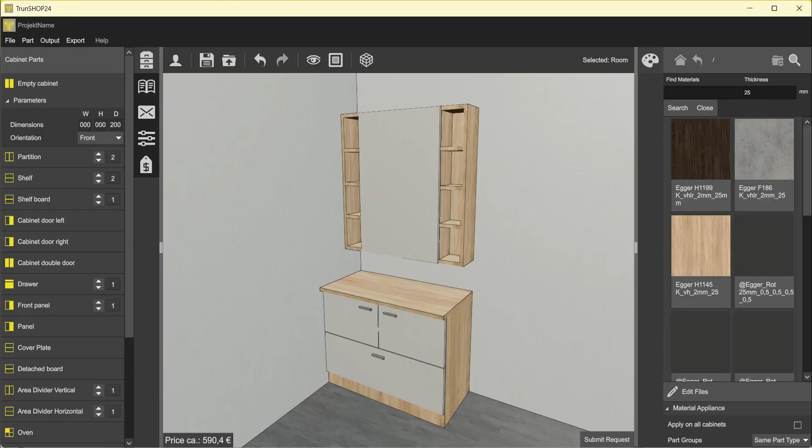In this video, I'm going to be showing you how to create a bathroom vanity with wall units like this one.

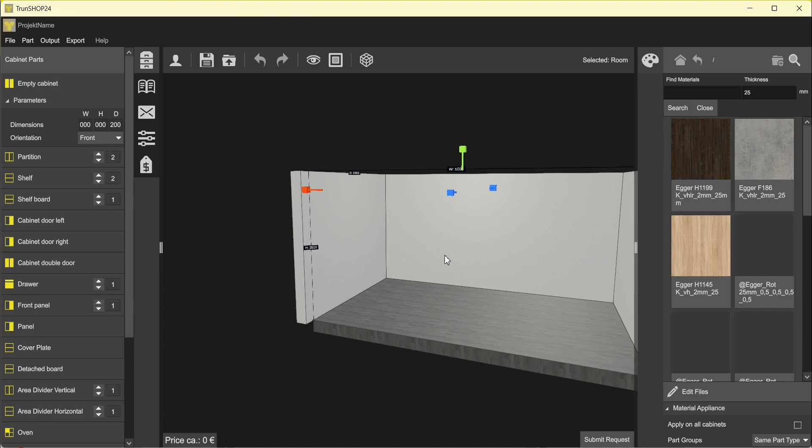Okay, so as always, the first thing that we're going to do is go here on File and start a new project. And then we have our empty room. I'm not going to change the dimensions of the room because I'm just going to place our design in the corner, that's it. But if you want to change the size, it's up to you. Remember, changing the size is always here. But for this project I don't need it.

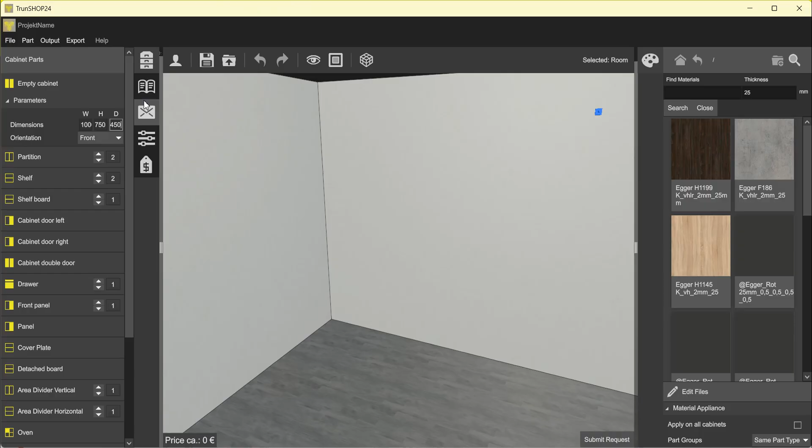So let's start with the vanity. We have the dimension of 1000 of width, the height of 750, and the depth of 450. Then we drag and drop. It's there. I'm just going to place it on this corner.

I'm going to change the material already to match this one. That's the default one. So you're going to come here on the magnifying glass. I'm going to type 25 millimeters and search. It's this one. I'm just going to drag and drop it there. So everything is the same material.

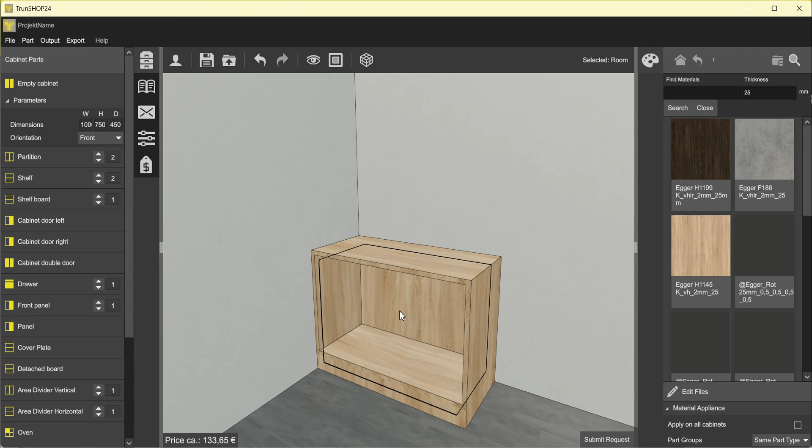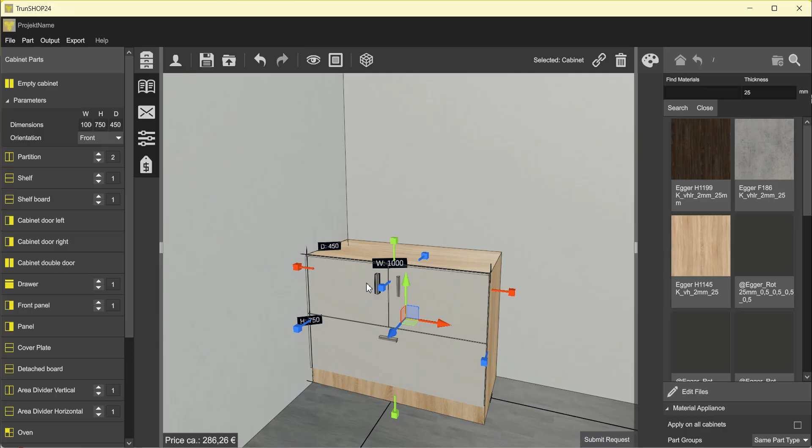Nice. I'm going to apply one shelf in the middle because in this part I want a drawer, and the top part will have two doors. So one drawer here like this, and for this part the double door, so cabinet double door like this. I'm going to change the handles because I want them to be all horizontal. So grid settings here—oh no, sorry, horizontal—and yeah, it's changed just like this.

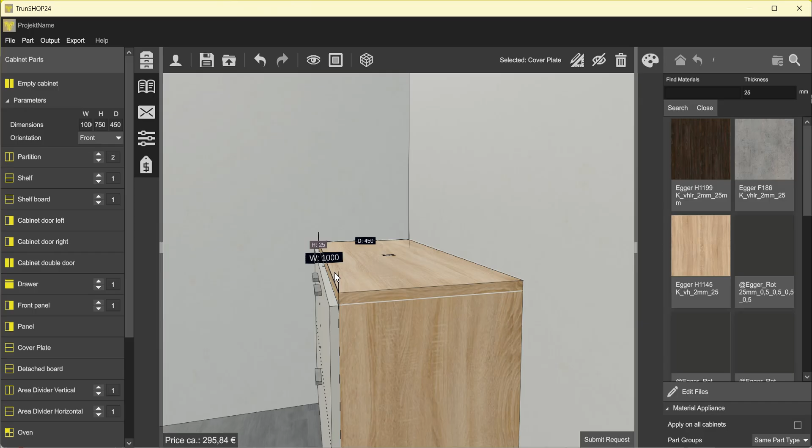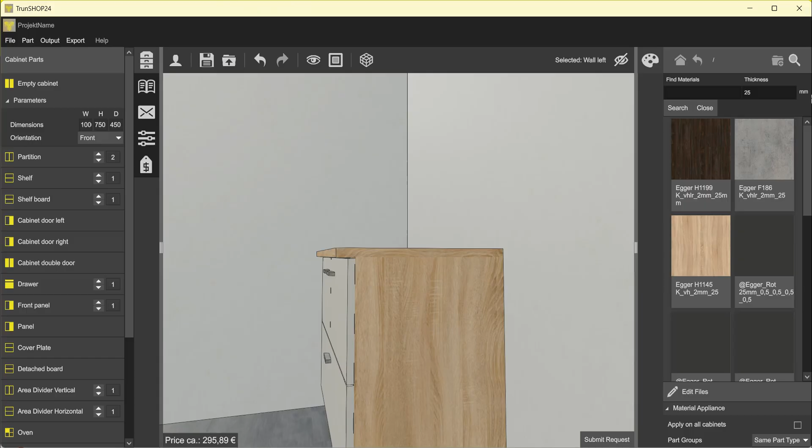Now I need a cover plate. So I'm going to come here, cover plate. I'm going to drag and drop, but as it's a wet area, I want the cover plate to go all the way here, so I'm going to add 50 millimeters on the depth. I'm going to come here and put an overhang front of 50, 50, and then it's like this. You can see that it's going all the way to the front.

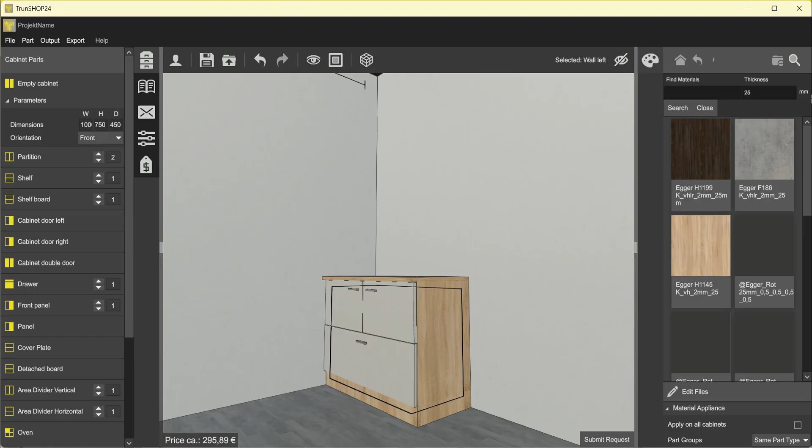Okay, I'm going to put just 750 of height because this would be for those sinks that are put above, not inside. But the dimensions are up to you.

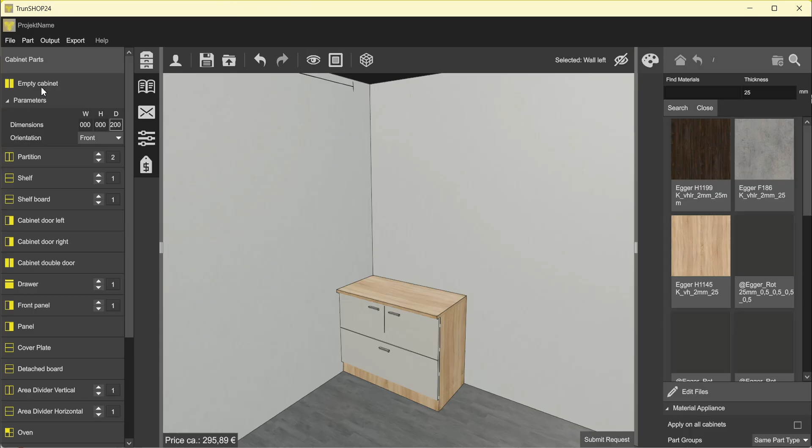So let's put the wall unit that you could install a mirror. So 1000 here, it's the same. The height will also be 1000 and the depth will be only 200. Then you drag and drop. We're going to remove the baseboard because we don't need it, and then like that, and the height of 1000 like this.

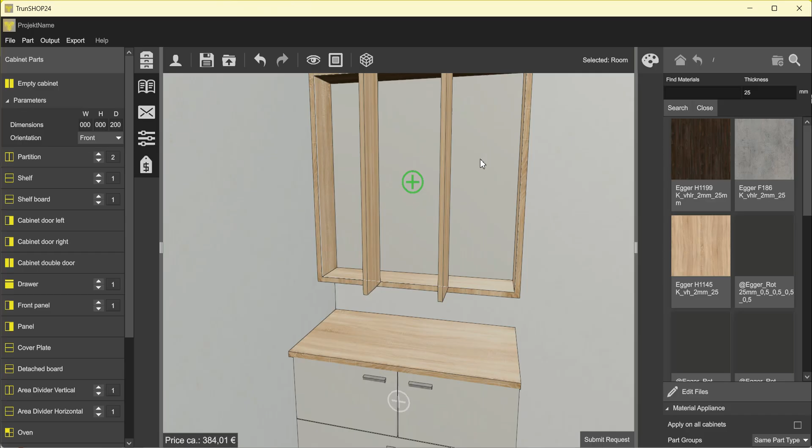Now we're going to apply two vertical partitions like this. We can already just adjust the material, so it's already here. We're going to just drag and drop, so like this. And then for the middle part we're going to adjust the width to 600, just like this.

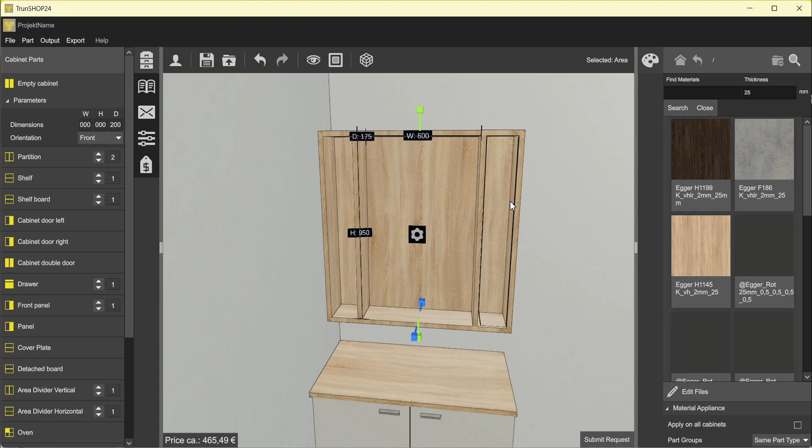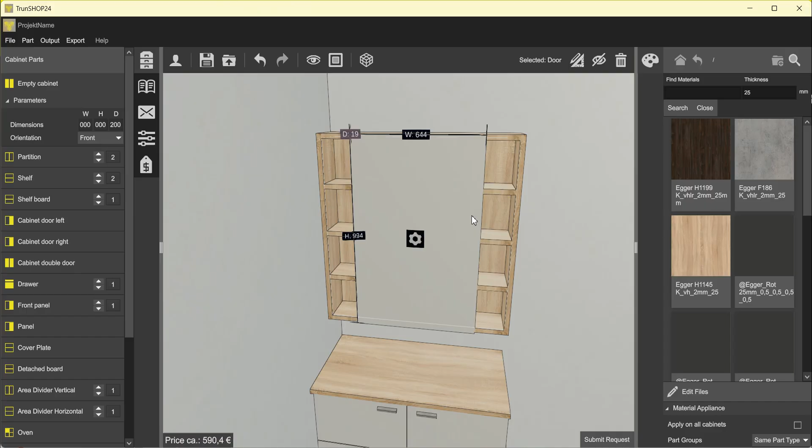On those parts, the left and the right parts, we're going to have 3 shelves on each, and the middle part 2, like this. And then we can also place a door, so cabinet door left like this, and remove the handle because we don't need it, because it's to install a mirror later. And just like that, we have our design complete. If you have any questions about the design, please let me know.